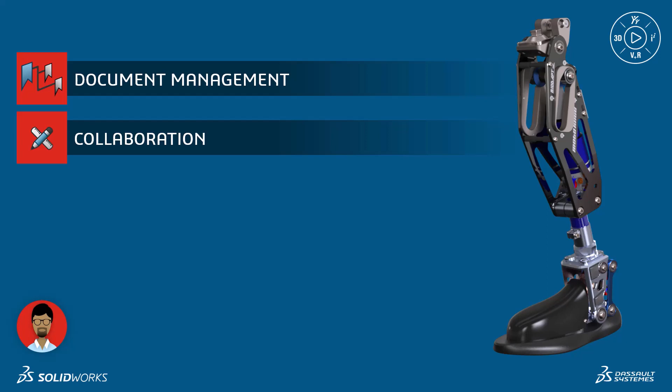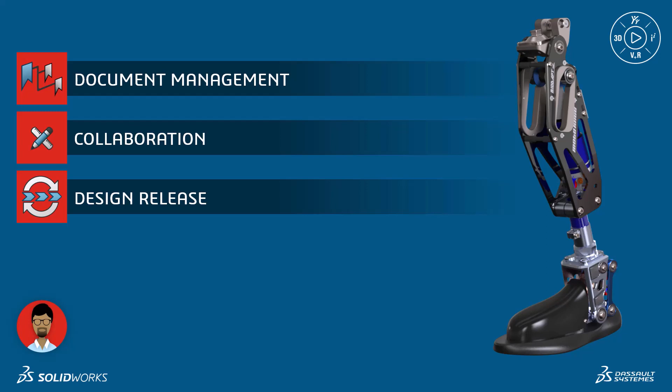Let's follow Eric as he uses the 3D Experience platform to securely organize and manage his latest project, the BioDapt MotoKnee. We'll look at how all product development documents can be easily stored on the platform. We'll see how Eric can collaborate with other members of his team without the need for emails and disconnected communication tools. We'll look at how the platform can assist with many of the tedious tasks associated with getting a design released.

Logging into the platform, Eric begins reviewing the tasks he needs to finish before the end of the day. Tasks are a simple way to keep the whole product team on the same page. To keep the project on schedule, Pete needs him to finalize the knee models so that Sam in manufacturing can review.

And Megan needs Eric to add and update the product specification document to the project. After reviewing the details, Eric simply drags and drops the task into the In Work column so that Megan knows he's working on it. Eric keeps his whole team on the same page by organizing their product documents into bookmarks.

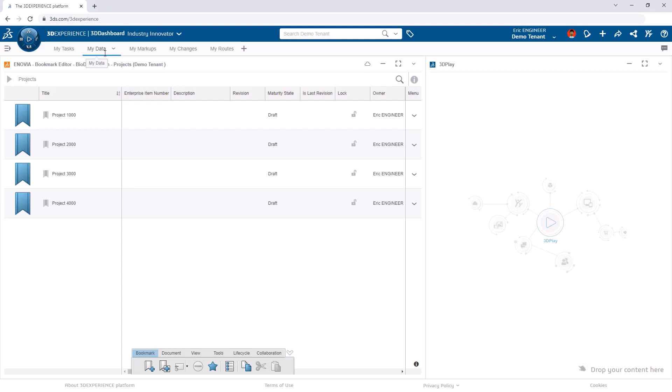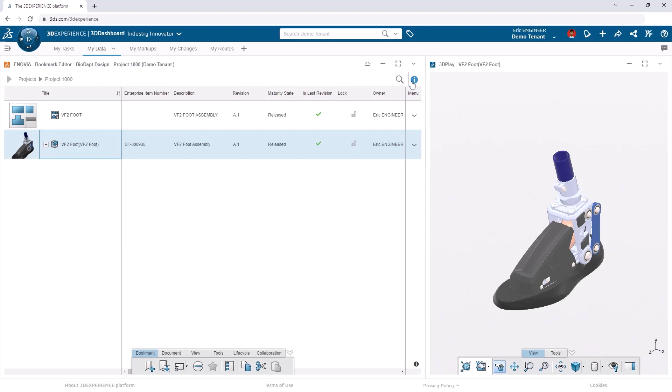These collections provide a familiar structure for organizing and navigating all product documents, and provide quick insight into design properties. 3D models can be previewed. Detailed property information can be accessed, and supporting Office documents, like the product specification, can be easily dragged and dropped into the collection.

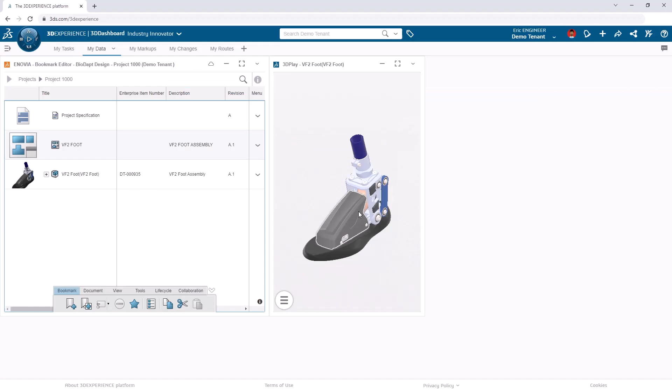Programs like Excel, PowerPoint, and Word all have integrations with the 3D Experience, allowing Eric to browse to the product specification document and open it from the cloud. Eric updates the title of the document, as well as adjusts the date, and then saves it back to the platform, providing a short description of what he's updated.

At any time, a full version and revision history of the document can be accessed, so that the team can quickly pull up an old revision if needed.

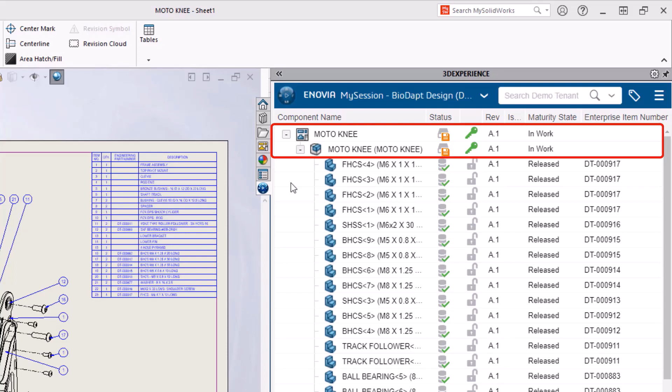With Megan's task completed, Eric moves on to finishing up the knee models in SOLIDWORKS. The task pane provides valuable insight into whether the design has been saved to the platform or not, document reservation status, as well as the revision. It's also easy for Eric to identify whether a document has been released or not, and what its part number is. With a simple right click, Eric selects to save his drawing and assembly.

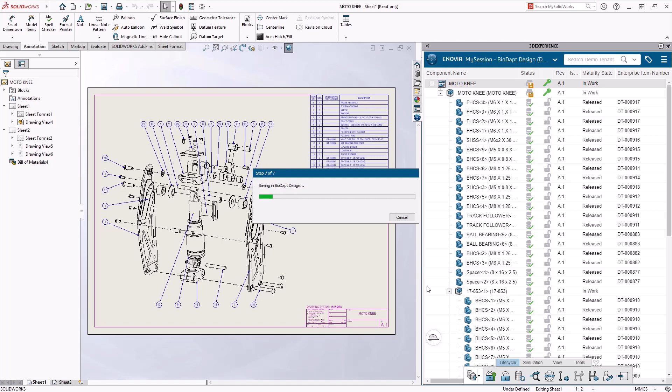Just like the Office integration, he has full access to the bookmark structure, ensuring he saves his design in the right project. He'll add a quick comment and then save the design. Only the files that have changed are pushed back to the platform, ensuring the process is as efficient as possible.

Now that the design is saved, Eric can access his tasks directly from the task pane and cross another thing off his busy day. With the 3D Experience platform, Eric has peace of mind with secure cloud-based file storage for all his team's project data. Eric wants to get Sam's opinion on the design from a manufacturing viewpoint.

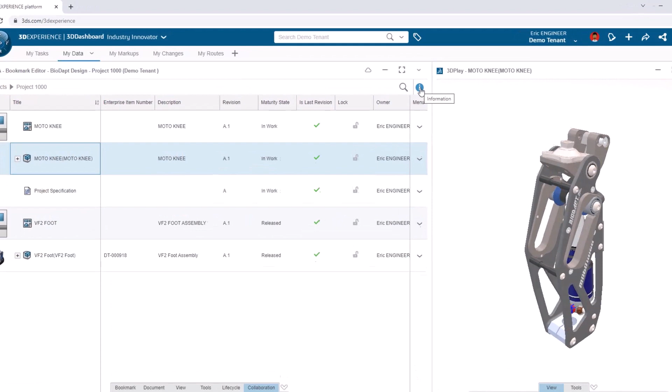This traditionally would have been an email to Sam and a lot of back and forth. Let's see how Eric and Sam approach this now. Eric starts by accessing the properties of the model directly and navigating to the comments section. Comments allow him an easy way to tag Sam and to share information directly connected to the model. No email, no attachments.

Let's catch up with Sam and see what his thoughts are. Sam gets notified that he has a new mention from Eric. He clicks on it to see what Eric had to say. Additionally, he has easy access to previewing the 3D model.

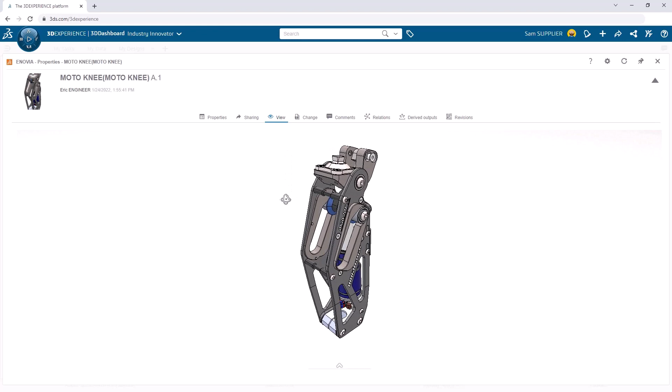Sam's not a SOLIDWORKS user, but he needs to better understand the product structure of the design. So he closes the notification and does a quick search. Once found, he drags and drops it into Product Structure Explorer.

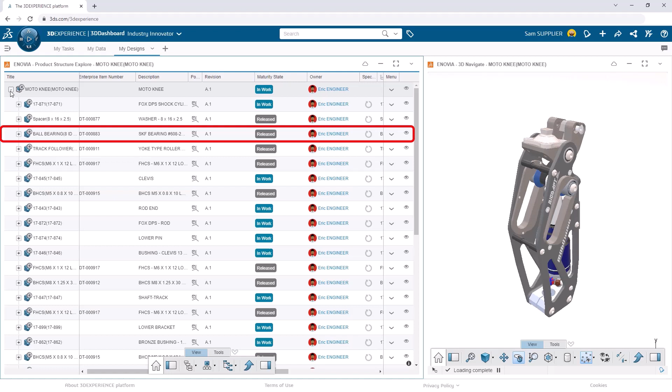This tool not only allows him to see the product structure, but also see key information like part numbers, maturity state, and ownership. In addition, he can drill down into individual items and see related documents, like this first article inspection document. As helpful as it is to see this structure, Sam's job requires him to look at things differently.

With 6W tags, Sam can choose to group the structure based on criteria such as whether the parts will be made or bought.

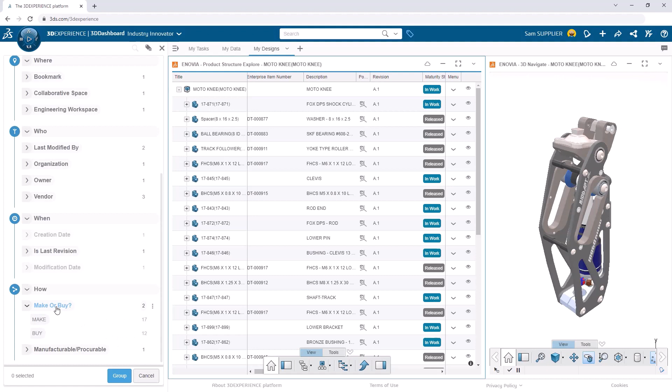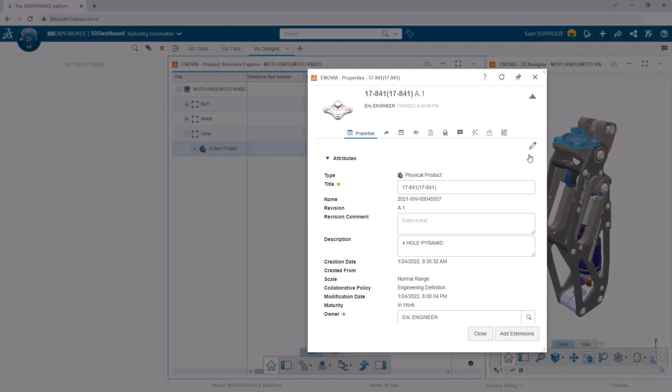He can now expand the Make group to see the manufactured components, and he can quickly identify that Eric has forgotten to indicate the status for the 4-hole pyramid. In the spirit of collaboration, Sam opens the property dialog, edits the properties, and indicates that this part is definitely something they can manufacture in-house.

With a quick refresh, everything is updated.

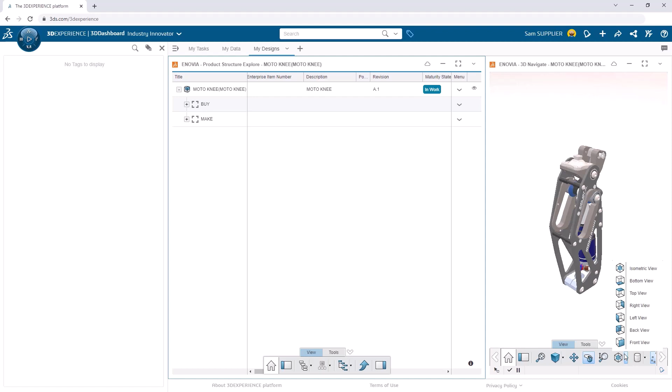As Sam begins to look further into the design, he has an idea that he thinks could make it more robust, reduce the number of parts, and be easier to assemble.

Using the built-in communication tools, he reaches out to Eric via chat to see if he's available to discuss his ideas. Eric responds and offers to start a call.

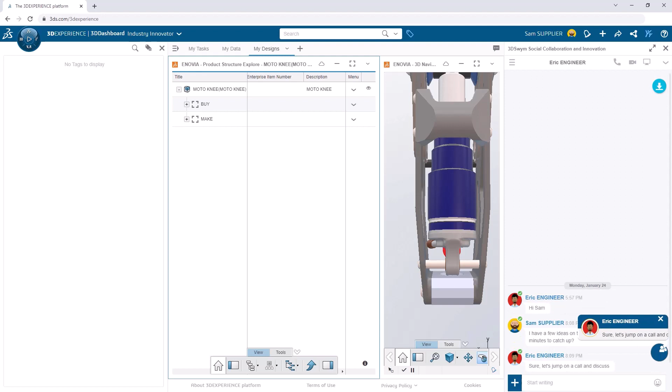With screen sharing, audio, and video built into the 3DEXPERIENCE platform, it's easy for Eric and Sam to collaborate on their ideas. Eric begins to share 3D markup on his screen. This is a powerful way for him to document Sam's ideas.

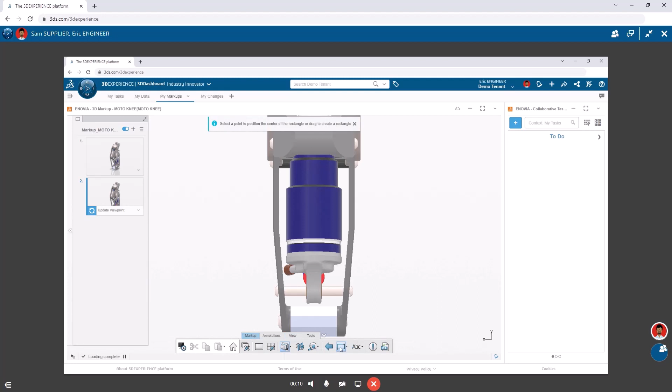He begins to sketch out supports that can be integrated into the bottom bracket, which will better support the shock. He indicates 2 holes that will need to be added, and changes their style to better reflect the design intent.

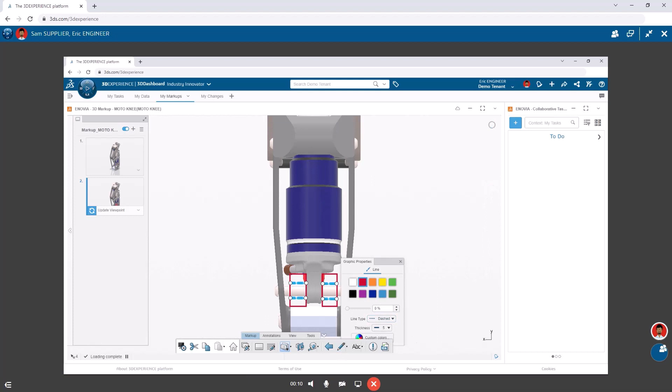Finally, he adds a note indicating the need to remove the current pin and use a shoulder screw instead. Eric updates the slide to capture the model orientation and notes.

Eric's planning to work from home this afternoon, so he creates a task for himself to remember to make these changes. Once the task is created, he can simply drag and drop both the assembly and the markup onto the task, so he can easily access them this afternoon.

The 3DEXPERIENCE platform provides Eric a powerful set of integrated communication and design review tools that make the team more efficient. Eric's had a busy yet productive morning, but now has to work from home this afternoon.

Without missing a beat, he picks right up where he left off with making the design changes and getting this design released. He starts by accessing the task directly from SOLIDWORKS, where he can select to preview the markup from the conversation with Sam.

He has full access to the slides that were created and the details they contain. Before Eric makes any changes, he wants to make sure he hasn't used this bracket part in any other designs.

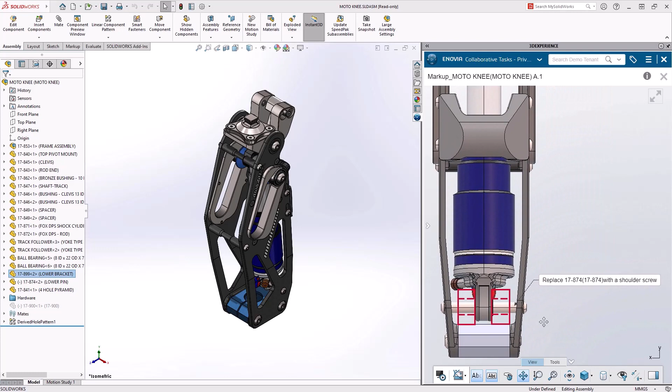This is easy to do by simply selecting the part and choosing to review its relations. As he digs into the relationships, he sees that this bracket is also used in a non-sport version of the knee design. It's best if he creates a new bracket instead of revising the old one.

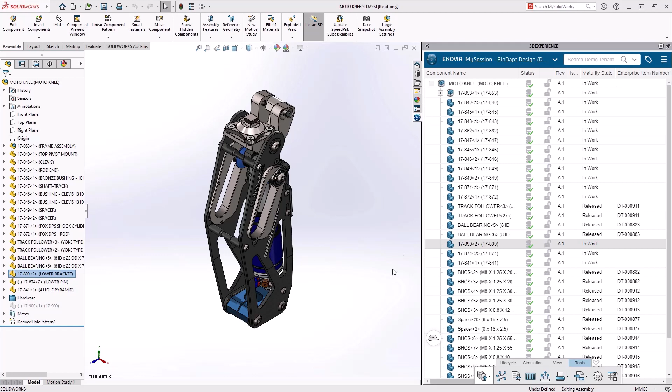Although the drawing and assembly are still in an in-work state, Eric wants to capture the design changes he's about to make with a secondary revision.

He'll simply right-click on the drawing and assembly and choose to create a new revision. Add a comment, and then revise.

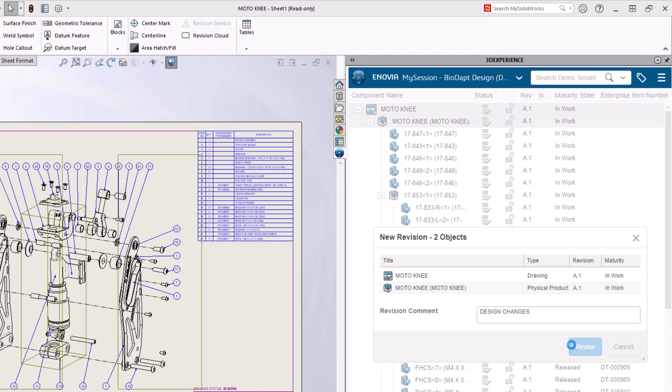He's visually alerted that a new revision now exists and can choose to load it with Replace by Revision. With powerful revision management capabilities, Eric can choose to load past revisions or new ones at any time.

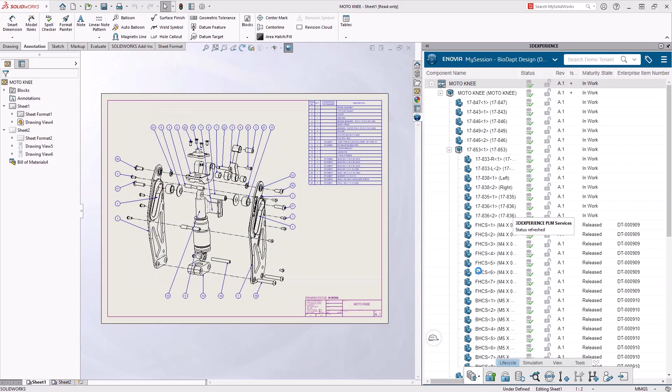With A.2 loaded, Eric locks the assembly and the drawing so that he can begin working on them.

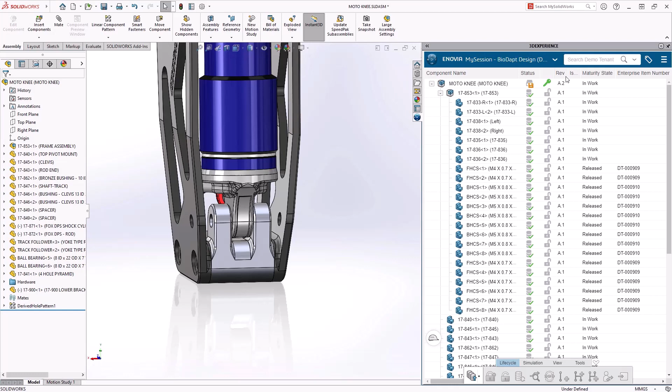In the assembly, he swaps out the old bracket with the new one he's just finished designing. He then uses the powerful search capabilities to find an M6 shoulder screw that he can use in his design. Once found, he drags and drops it into the assembly and then mates it into place.

With the design changes made, Eric's ready to finalize the part numbers and release this design. He switches back to the drawing, sorts the design by enterprise item number, and then selects the items that need numbers assigned.

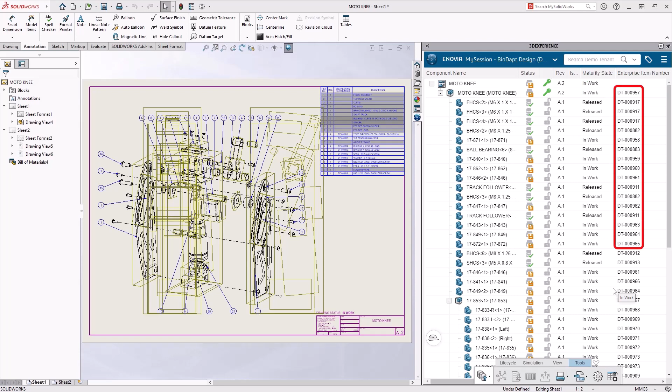This makes it easy for Eric to ensure that all items have part numbers assigned before they're released. Not only that, the BOM is updated with new part numbers as well. Eric saves his changes back to the platform with a final comment.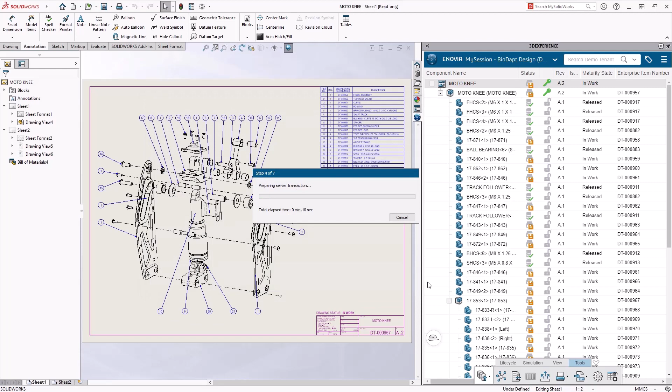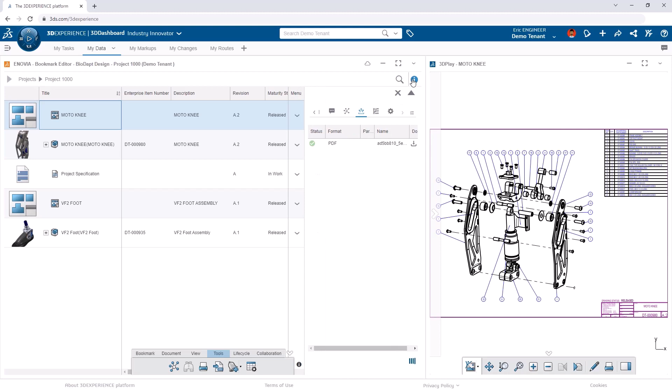And then proceeds to release the final design. Eric knocks another task off his list from an already productive day, and this one was done from home. The platform took care of automatically creating a PDF of the drawing for Eric as well, allowing him to move on to the next design.

Managing product data on the 3D Experience platform makes handling the details of the design release process effortless.

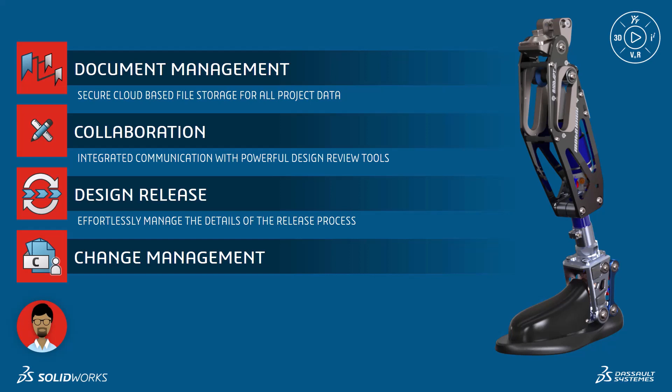The successful launch of the MotoKnee brought growth to the BioDapt team and the need for additional structure to their design change management, including the need for approval routes, issue tracking, and formal change actions. To handle this, Eric created a standard route for all the team members that need to review and sign off on design changes. Route tasks can be both parallel or linear, and parallel tasks can require either all or any of the assignees to provide their approval.

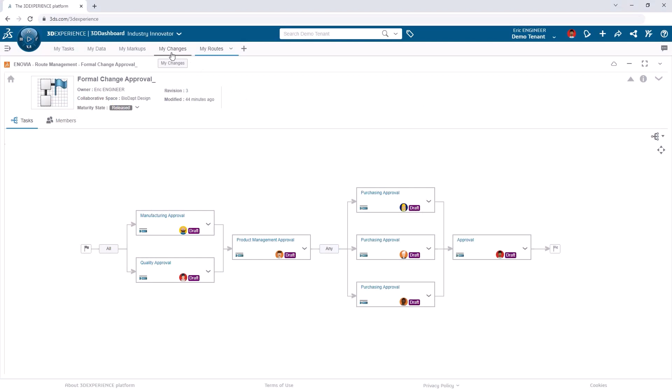Additionally, the team now utilizes issues when they identify a possible improvement. Issues create an easy way for anyone, like Ben in product management, to bring an idea to Eric's attention. Eric begins reviewing Ben's high-priority idea to reduce the overall weight in order to increase performance.

Ben has identified the part and assembly he's referring to, which makes it easy for Eric to review the request and visually see what Ben is referring to.

Eric's confident they can make the change, so he updates the issue to an in-work status and then starts a formal change action directly from the issue.

All the information from the issue is copied over, making Eric's life easier. He simply sets the priority and a due date, and then saves the change action.

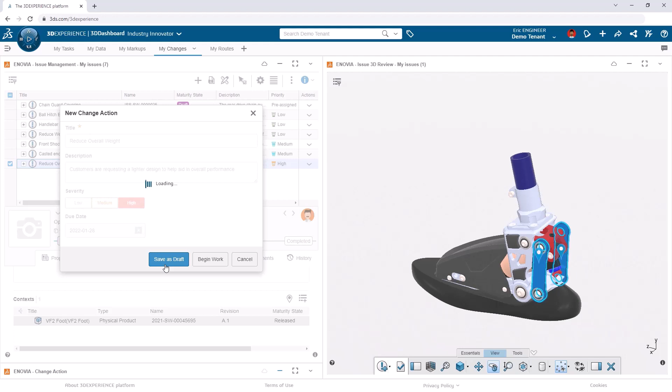With everything nicely correlated together, Eric begins the work of building out the rest of the change action.

As the owner of the design, Eric is identified as the assignee, and because Ben initiated the issue, he'll stay informed to its progress.

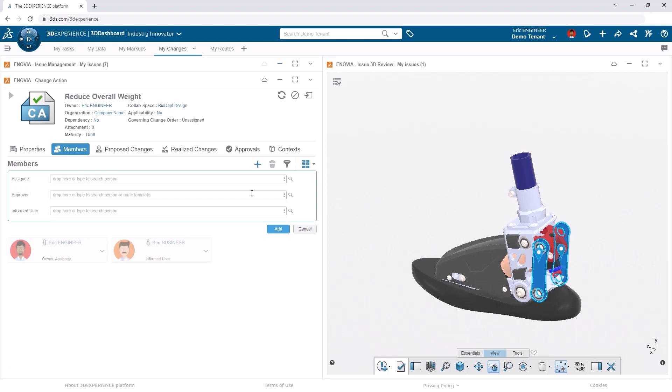For the approval, Eric can simply add the approval route template to the change action.

With any change, it's important to do a full change assessment. With the 3D Experience platform, this is a mouse click away.

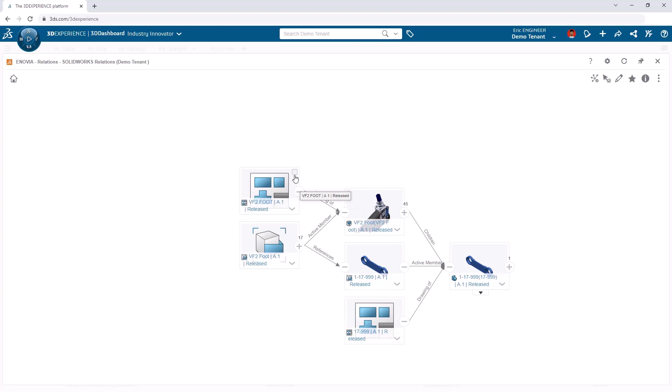Eric is able to easily see the drawings and assemblies that are now impacted by the design change. Once selected, they can be dragged and dropped onto the change action.

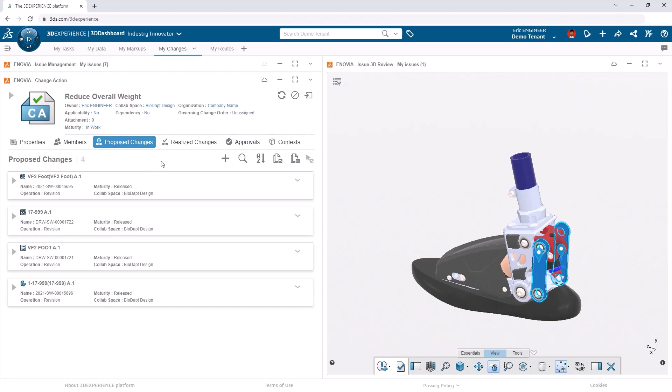Now, Eric just needs to move the change action to an in-work status. And when he does, the change action takes care of automating the creation of all the needed revisions.

The change action now provides the needed permission for any changes to the design it's connected with. In order to make the design changes, Eric simply needs to work under the change action inside of SOLIDWORKS.

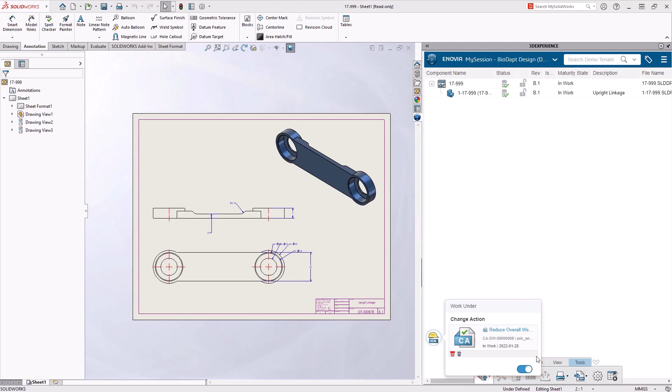With material now removed from the linkage, Eric will set the design status to frozen to indicate that it needs to be reviewed by the team.

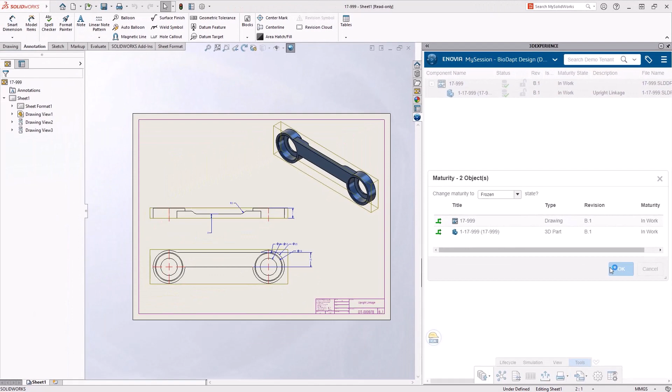Eric updates the change action directly from SOLIDWORKS. Once all affected items are set to frozen, he's ready to initiate the chain of reviews and approvals by moving the change action from in work to in approval.

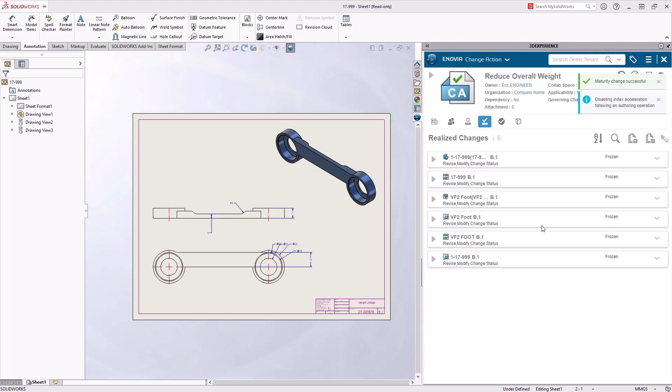As each stage of the approval route is approved, the change action is updated. Now, all that's left is for Eric to provide his final approval. He double-clicks the task, adds his comments, and then selects Approve.

He's then presented with the e-signature, providing him the ability to attest to his approval by entering his username and password.

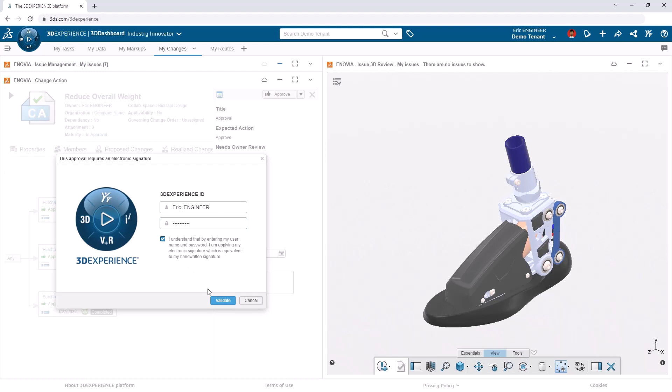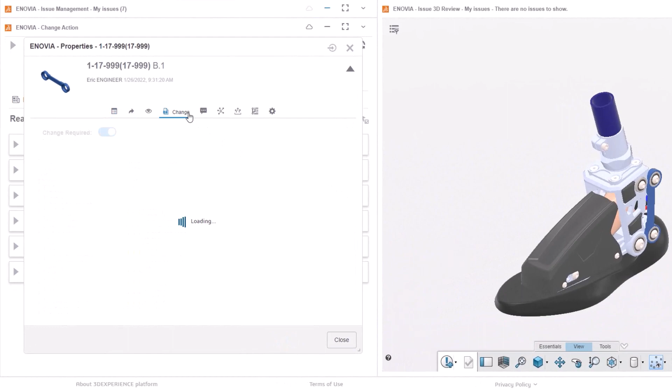The approval of the change action automatically changes the lifecycle status of the affected items to Released. In addition, the properties of the item now indicate the change action as the reason for the release, and captures all the sign-offs, providing full traceability.

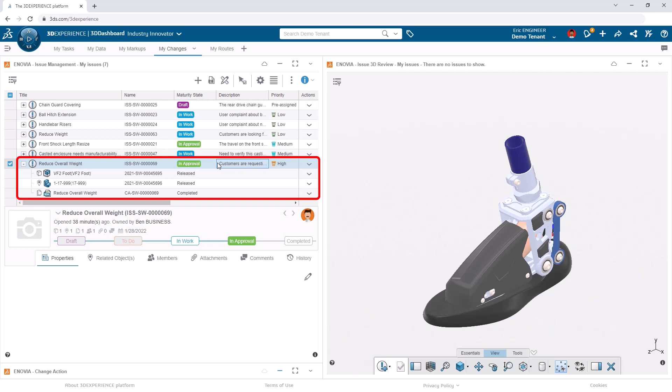To close the loop with Ben, his original issue has been automatically transitioned from in work to in approval, and after review, can be closed out as well.

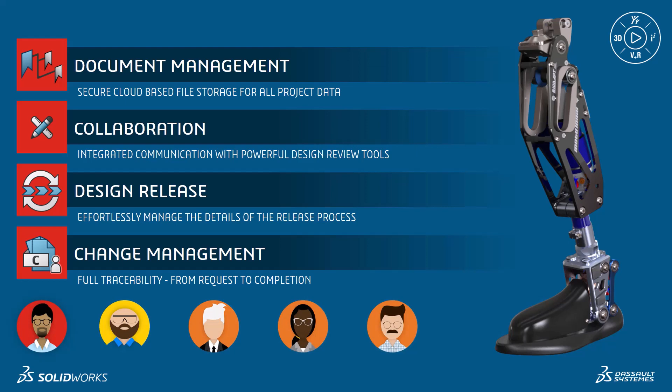The 3D Experience platform provides full change management traceability from request to completion for the whole team. From document management and collaboration to design release and change management, the 3D Experience platform provides you and your team with the tools you'll need to provide alignment to your processes and structure to your data.